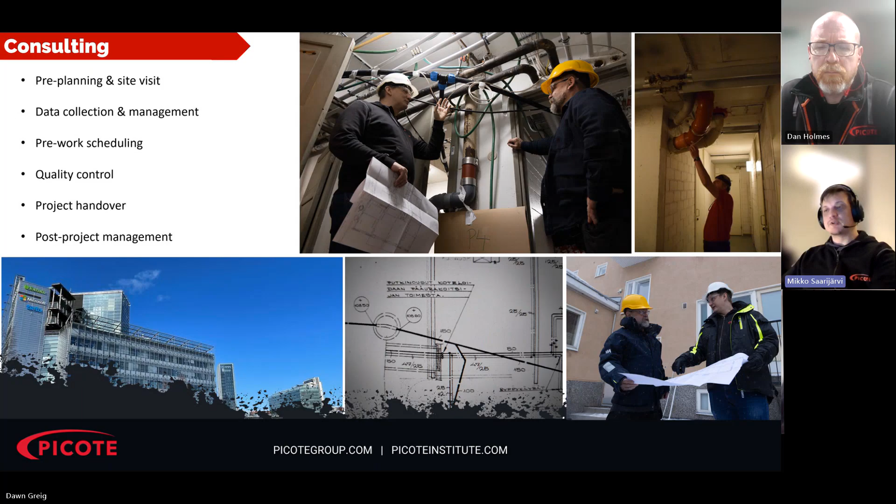And the first project as a case study, there was a project in Leipzig, Germany. We of course, for the customer, did the initial site visit, collected the data, had a look around the work areas, the storage areas, and the scope of the work. How much do we have to do? Where do we have to go? Where do we need access? What diameters of the pipes, what lengths of the pipes we are going to be working on.

So it was ranging from 4 to 6 storeys. The diameter ranged from 50 millimeters to 150 millimeters, so 2 to 6 inch. There were multiple bends, different kinds of access points, be it apartment, attic, basement, restaurants, lots of variables in the situation.

And after the initial site visit, we allocated resources. We looked with the contractor at what kind of tooling and machinery they have, and what we would think that we would need. Then we, of course, made the necessary arrangements for the contractor to get the right equipment to the job site.

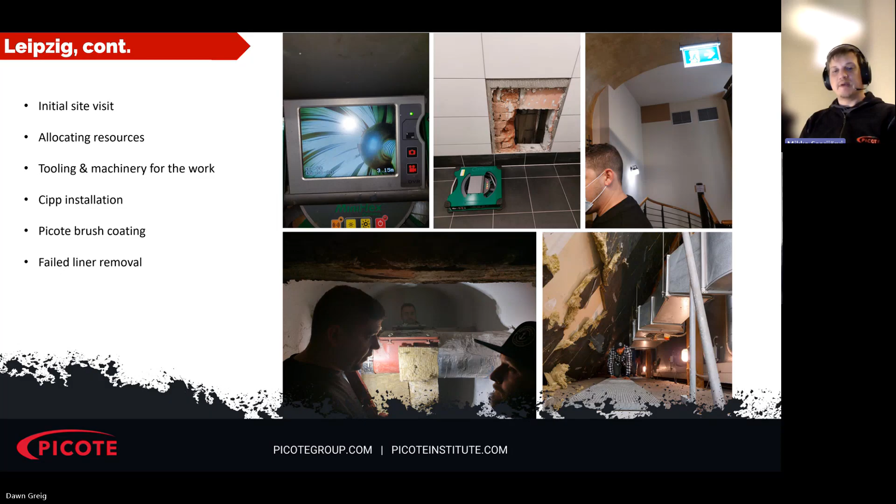The next one would be a consulting job in Santiago, in Chile. Again, the initial contact from the customer was to help them with planning and pre-planning and project management. So we went over there and had a look around the actual project itself. Also the work sections: there were 3 different buildings. All of them had about 100 apartments, so it was quite a large project.

They were actually working on each building at the same time as well. So for the project manager it was very time consuming, as there were 4 crews of 4 people working. So there was a lot going on at the same time in different places. So the first thing we tried to see is the work sections and the work order for the guys and the crews, so it would be much more manageable for the project manager. Also, the inventory of the equipment, what they were doing and what they actually need in order to do the job more efficiently, and usual maintenance of the equipment on the job site.

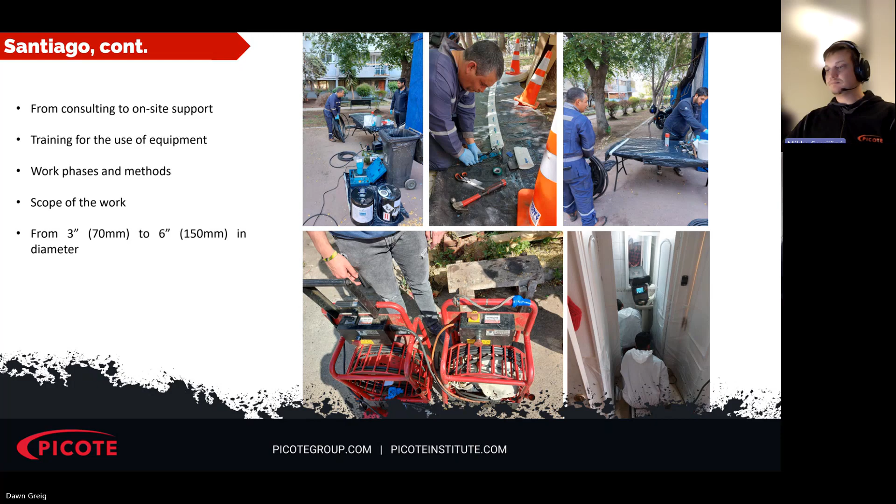So continuing doing the on-site support and consulting. Once we got the crew working as intended and more efficiently, we started to do more project management and manpower management. So again, we identified different places at the work site, what might need more manpower, what could do with less manpower, and started to shuffle the crew around a little bit. Also started to organize the work phases better. So, for example, the preparations were made by one of the crew before anything starts. So when the actual work starts to happen, everything would be already ready, and everything would run smoothly.

Main things were the correct use of Picote equipment, cleaning and descaling. We managed to make that quite a lot faster for the crew. Picote connection collar use, and failed liner removal. Again, there were a couple of places where we had to remove the liners, and we taught that with the on-site support. But yeah, there's a couple of cases over there, and I think I'm gonna pass you guys over to Dan now. He's gonna be talking about the next one.

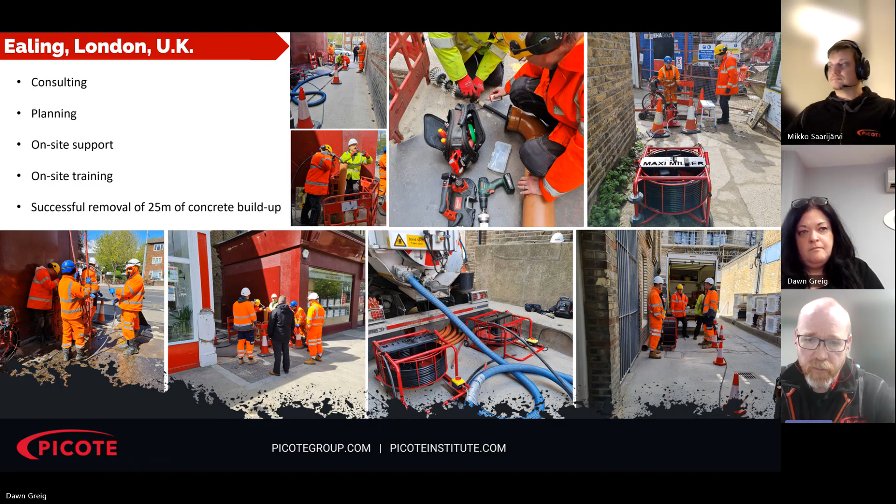We took a Power Plus and we took a Maxi Miller, and we managed to remove all 25 meters of the concrete buildup with their team. So this was a case of on-site support and on-site training that they were very happy with. So happy, in fact, that they then purchased a couple of vehicles and kitted those vehicles out with the Picote equipment that they'd used, and all the tooling, so that they can go round that water company's area removing concrete from drains. So that worked really well. It was a very successful job. The customer was very happy with that.

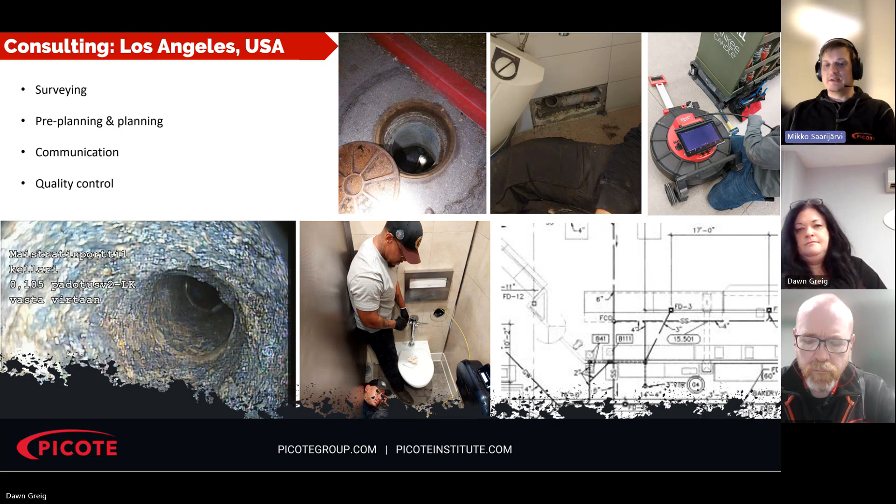This was a consulting job in Mexico. They had a lining job, and they were trying to get more efficient. Again, most of the work on this was actually descaling and cleaning, and how to get that more efficient and faster. They were struggling to do the descaling in less than 3 days. So we managed to get through this. It was mostly virtual training and online support for them.

So we managed to reduce the time of the descale and cleaning quite a bit, and the customer is really happy, and really happy with the Picote machinery as well. So that was a good one.

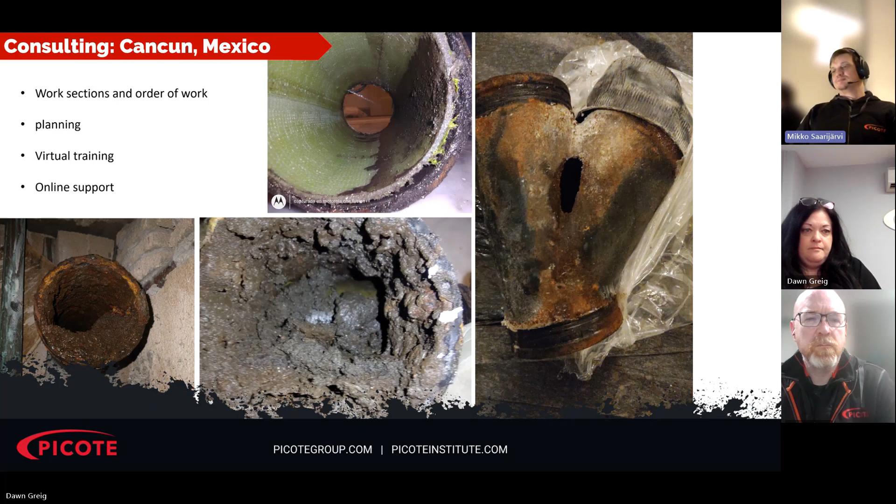They then took our equipment over to the Isle of Wight to install 170 meters of 140 Picote flexi slip lining pipe. It was quite an interesting job, this one, because as you can see, that pipe's being installed on a beach. So the water table there was obviously driven by the tide. They couldn't line it because of the amount of water ingress in this particular pipe. You would have really struggled to have lined it.

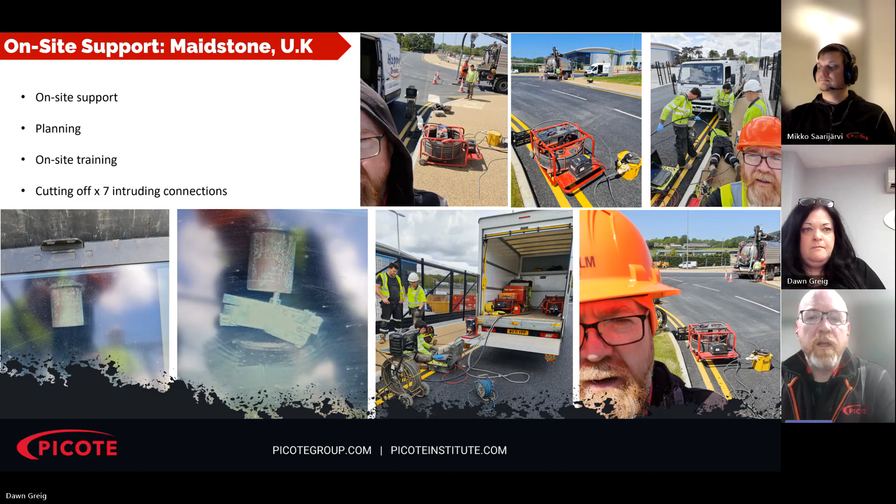All right, this is again a consulting job in Arizona, USA. This was also mostly done virtually.

They had quite a large project. They were already accustomed to Picote equipment, but they were not accustomed to the small diameter rehabilitation. So this was a two-parter. There was a pre-planning and planning work section: order of work, what to do in what order, how much you can do in a day, in a week, in a month, in what order it would preferably be done, what kind of crew you need, etc. That kind of online support consulting, and then there was another part of training.

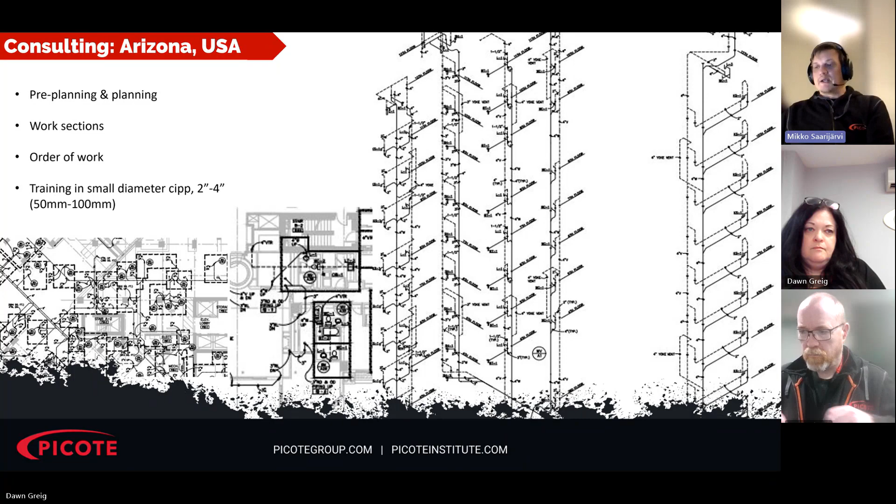So luckily our training center manager Kimmo from Finland was visiting US Phoenix at the same time, so they trained them to do CIPP on small diameters from 2 to 4 inch, as well as doing the coating. So yeah, that was a very successful one as well, and I think the project is almost finished at the moment. They're about 3/4 finished on that job site.

Yeah, this is one of the things as well. We also do testing in our Finland training center. So, for example, in the picture on the right side, we are doing some coating testing with our Xpress pump and we are looking at the final results of those.

In the middle, you can see pictures of us doing lining testing for a Singaporean customer on S-traps, as a proof of concept, just to make sure it is possible to line them. My personal opinion, if they are accessible, I would remove the S-traps, line the straight sections and then reattach them. But again, we managed to do the lining on that. The far left picture is from our training center in Finland whilst training is at work. Yeah, that was for the testing.

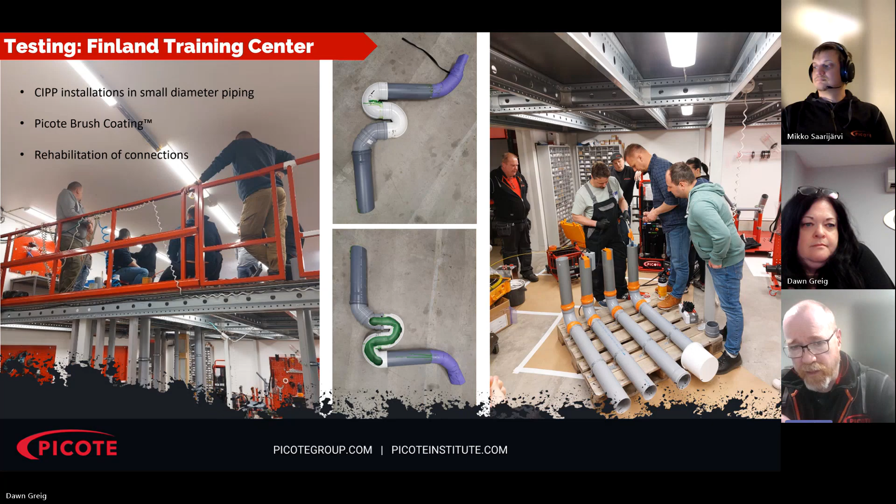And talking of brush coating, we have the new Picote Xpress coating system, which is a fantastic bit of kit because of the way the resins are held in the pump unit itself, and it also has a continuous delivery hose system. So you're always pumping raw resin right up to the point just before the brush, where you then mix it. So the wastage is very low, and it comes with 40 meters of hoses. So in many cases it's far more adaptable, because you don't have to drag heavy machinery up onto the roof or down into the basement of a building.

Although this pump's a lot easier to move around because it's got a stair climbing wheel system on it. But because you've got these very long hoses, you can leave the machine in a certain position and drag them out to where your access point is, and then do your coating. The other huge advantage with this resin and this system is that there's a 1 hour cure, or up to 75% faster curing. So depending upon the ambient temperature and the temperature of the resin when you mix it, it's extraordinarily quicker than the existing system.

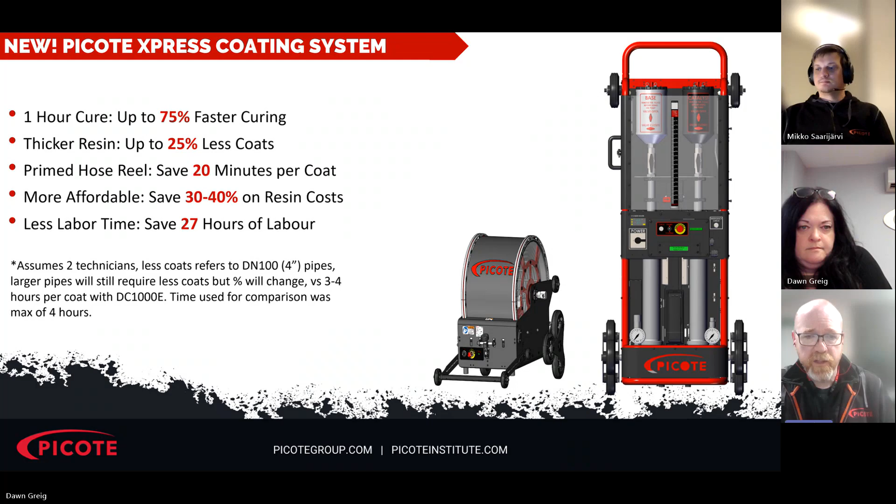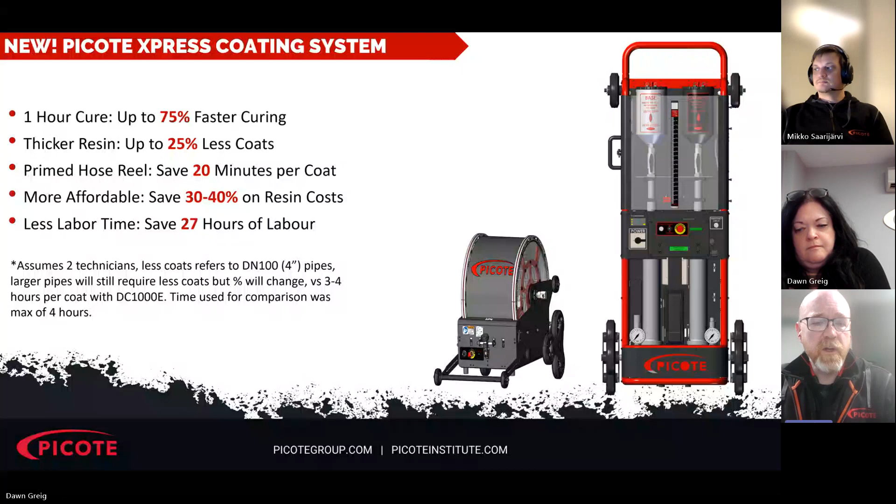The resin goes on an awful lot thicker as well, so you don't need as many coats. With the old system you might need 3 or 4 coats; with this one, you're only going to need 2 coats. And if that cures within an hour between coats, you're in and out in a day. It's much easier, much quicker than the previous system because of these primed hose reels. So it's far more affordable, save 30-40% on resin costs because you're not using as much, and it's cheaper to buy in the first place. And less labour time because you're not on site so much. That assumes 2 technicians are there doing this.

Okay, so yeah, fantastic bit of kit. Can't wait to get out on site and do a bit with it. It'll be really good, but we've only just started shipping them, so I'm sure it will come soon.

All right, we are going to be turning from the coating to lining. We got a couple of very nice, neat products for that. Firstly, we had the Midi Steamer. It's made to be very simple, so it's going to be easy to use. It's for the most part fully automated, so you can set the temperature with the thermostat, and you have a timer in it. So whenever you're doing an installation and you need steam, it's going to be very easy to use.

Let's say you want to have 80 degrees Celsius for 40 minutes, so you set up the 80 degrees. This thermostat will keep the average temperature on the set level, and it's going to be running for the 40 minutes. After that, it will cut off the steam. It will still let the air go through. So once you set that up, basically you can go and get a cup of coffee or do another installation.

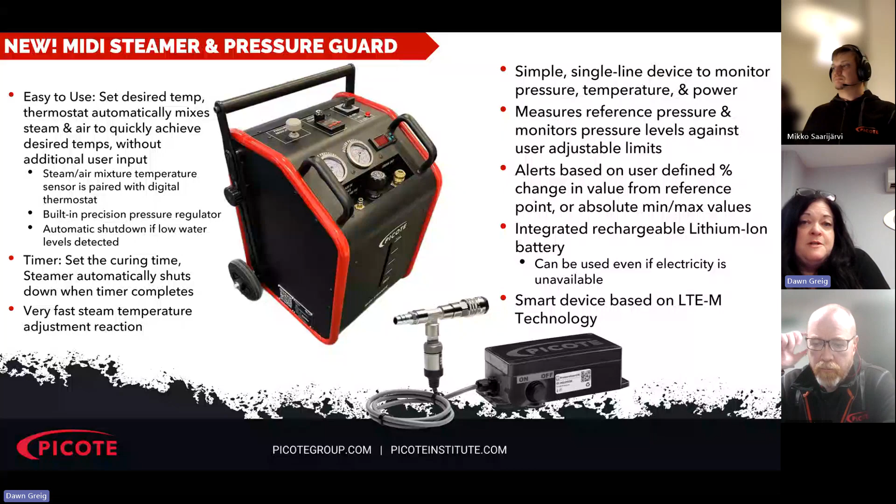Thank you, Mikko, and thank you, Dan. Does anybody have any questions about the technical support that can be offered on site, or the consultant services that we offer, or even about the new products? The reason why we mentioned those new products again is because when these come out, it's also possible to hire Picote to go out on site with you. You can be trained on site, or you could have that additional support on site that you need. Does anybody have any questions for Mikko or Dan?

Sorry, I have to come out of that and go into this. Okay. Let me just see what everyone's saying here.

So, Matthew: we'd like to see some examples of the final product as well as the machines. What about Y connections? Does it spill on laterals using the spray coating? And is there any official training and certification by Picote, or only site training? Well, that one I can at least answer for you, Matthew. Yes, we do official certified training, which can then mean that you can offer a warranty on the resin as well. So it's definitely worthwhile doing the certified training.

It's generally a 2-day course. If you've done Picote brush coating before, then it can be a 1-day course, because we've already covered all the prep and you already have all of that information. So just being trained in the actual pump itself would then take 1 day. Otherwise, it's a 2-day training course, or again, it can be done on site as well. So that's no problem. But I'll leave it up to Mikko or Dan to answer the other questions there.